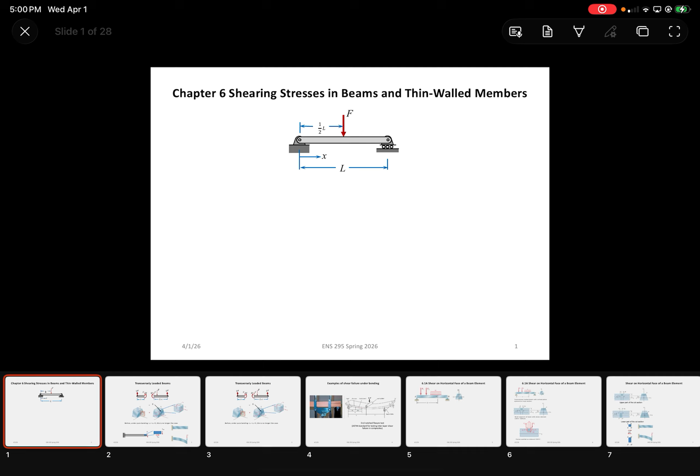That's two separate tires? Two separate tires, I think. He texted me and said, 'You're never going to believe this.' He sent me an email and said, 'You're not gonna believe this, but I got another flat.' I was just flabbergasted, I couldn't believe it.

Is it just the tires that he messed up? I don't really know, he just sent me 'you're never gonna believe this.' Hopefully it's just the tires, because when I got my flat earlier this semester, the rim got all messed up. I had to take it to a place because when I went to the Kia dealer, they quoted me like $1,000 just for the rim and tire. I was like, I'm not paying that, no.

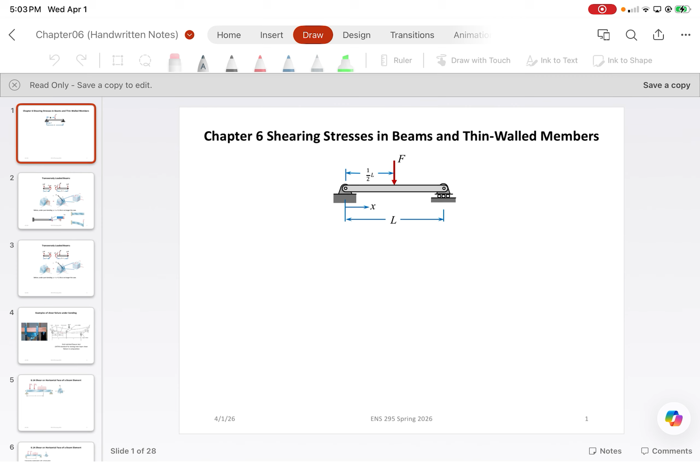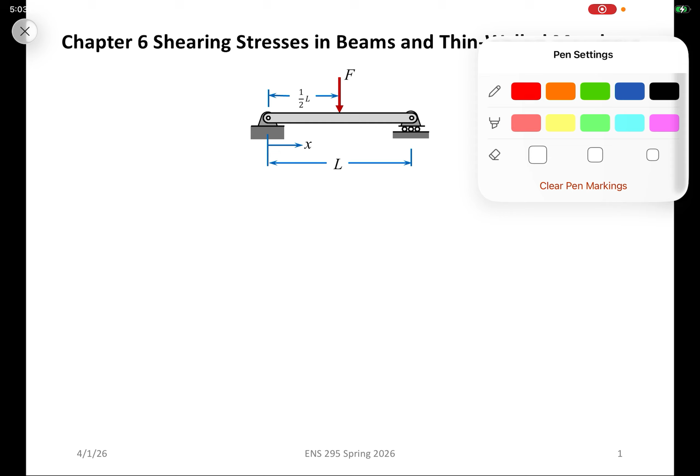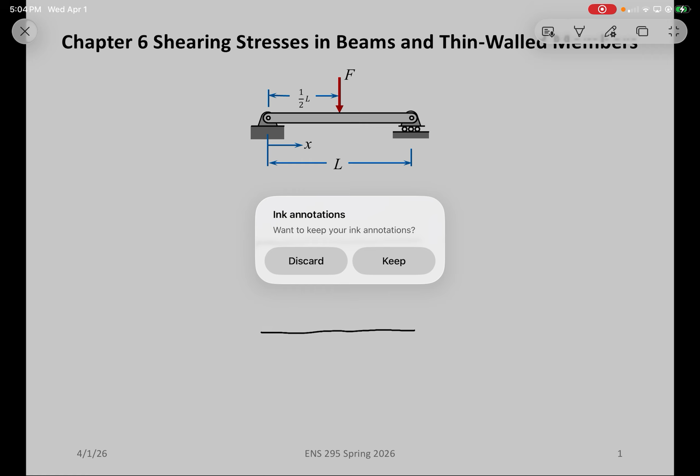So if you guys recall, we learned last class and the last few classes how to draw the shear force and bending moment diagrams from this loading shown here, where the load is directly at the center. What we should end up with is basically a shear force diagram that looks exactly like this: the shear force is going to be equal to F divided by 2, and then negative F divided by 2. Then from there, we learned that you can draw the bending moment diagram using the geometry of the shear force diagram, and that bending moment diagram is just going to equal FL divided by 4.

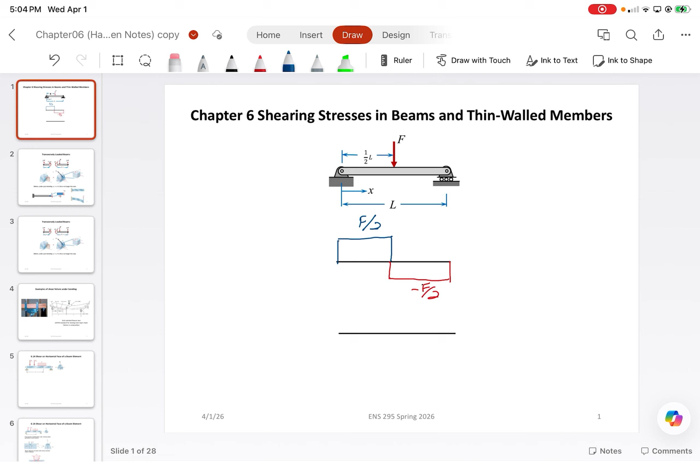You can do all of the cutting sections to derive the equations for each of the curves, but once you get familiar with a lot of these diagrams and the standard conditions, you actually just start memorizing a lot of the equations. I memorized this one and probably 50 other ones—you just get very comfortable with it. So we learned that from the bending moment diagrams, we would use the My over I equation, or the M over S equation, to analyze the beam in bending. But for shear, we still don't know how to exactly design this beam.

From the beginning of the semester, we have our average shear stress equation, which is V over A. We could potentially use V over A, but the shear stresses are actually going to be a little bit more complicated than this, especially in flexural members, which is what we'll get into.

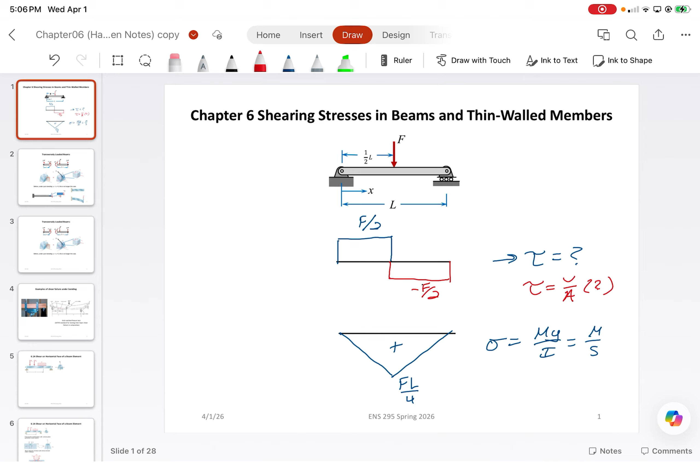For transversely loaded beams, what we have are shear force and bending moment diagrams. If we analyze a small cube at any particular extreme location, what we end up with is that stress block, which is something related to the Mohr circle. So we could actually draw Mohr circles for beams subjected to shear and bending.

In some instances, towards the extreme top and bottom fibers of the beams, which is the maximum location where bending stresses occur, you'll actually find that the shearing stresses on those edges are actually 0. We'll get into a little bit about why it's 0 and the mathematics behind it.

Ultimately, we can basically determine that under pure bending, the shear force is basically 0, because when a member is subjected to pure bending, the bending moment diagram you would see would actually be a constant value.

A good example of this would be if we have a beam with a cantilever support, and then just a direct moment is applied. In this case, you would actually find that your reaction force is 0, and hence you would just have a negative moment directly here.

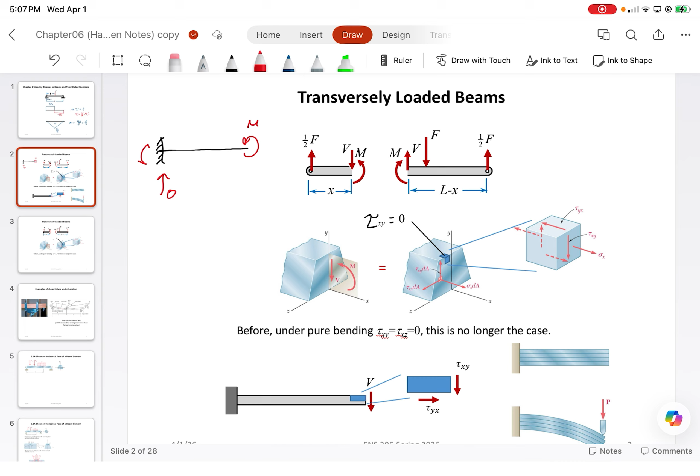Now if you were to draw the shear diagrams, you would find the shear force diagram is just 0. There's no vertical forces contributing to shear, but our bending moment diagram would just be a constant block like that. We call this pure bending, which is what we discussed in chapter 4. You just never really saw it from a chapter 5 perspective.

So that's why we have basically no shear force whenever we're subjecting a beam to pure bending, because there's no shear forces to contribute to shear stress.

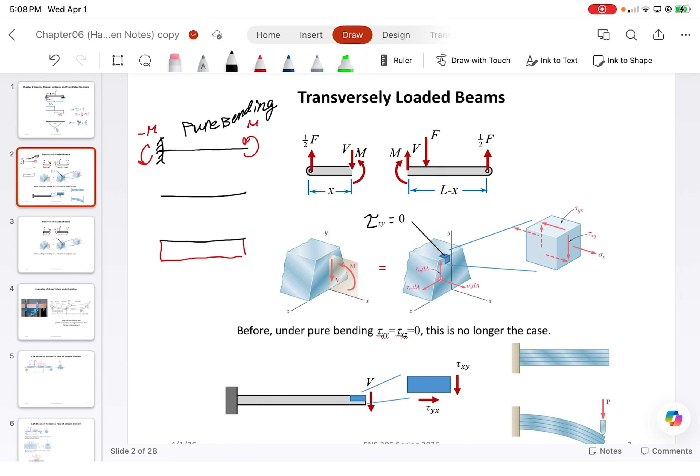So we move on a little bit, and ultimately what we would find by analyzing the equilibrium of these little nodes, you would find from sum of the forces in the x direction, we know that has to equal 0 for equilibrium. You would find that the integral of tau xz, that's this shear force located right here, coming out of the plane, times dA, that has to equal 0.

But if we do sum of the forces in the y direction— oh wait, no, that's sum of the forces in z. Yeah, because technically sum of the forces in x would give you the normal stress.

My bad. So from sum of the forces in the y direction, you take an integral of tau xy dA, and that integral should technically equal negative V. So the shear force is just equal to the negative integral of tau xy dA over the area.

Does that make sense so far? If you think about it, the cross-sectional shear force is just going to be acting downwards, V. The shear stress located here is tau xy dA. So when you do sum of the forces in y, you get that the shear force should just equal the integration of the shear stresses within the cross-section.

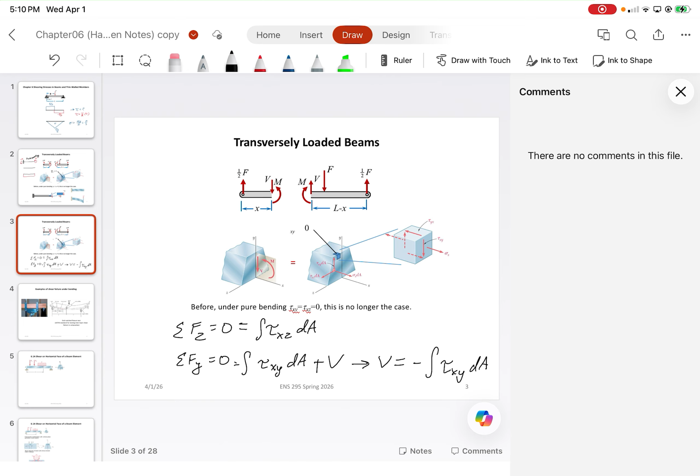Now, we learned previously how some beams may ultimately fail in bending. One of my favorite examples that I like to personally sketch out is generally with concrete beams. So let's say we had a concrete beam right here.

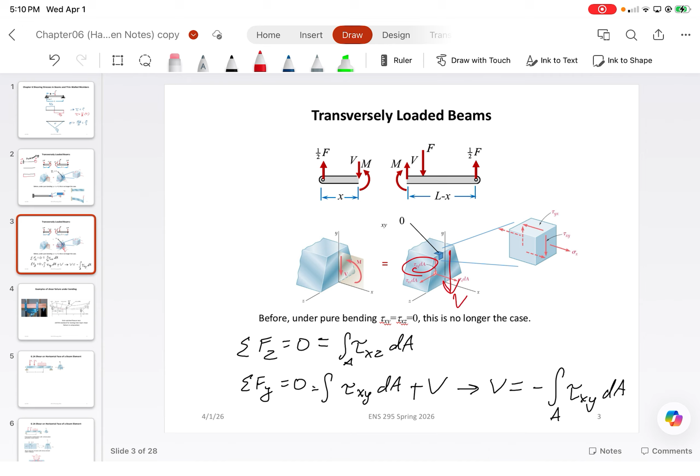In many cases, if you were subjecting a load directly downwards, you would actually find that the cracking is heavily dependent on the type of failure. So for bending cracks, where do you think they might most likely occur? At the bottom, along the midsection—exactly, because that's where the maximum bending stresses occur, resulting in maximum tension within that concrete beam. So you would actually see cracks start to develop.

Now when it comes to shear forces, however, concrete's a little unique, so the shear plane is going to be a little bit weird looking, but for steel and other metallic structures that behave more linear elastically, the shear planes would actually just be cracks that are propagating like that. For concrete, it tends to move on a 45-degree angle, but for shear cracks, you would actually see that the cracking is occurring more towards the end sections more than anything else.

Does that make sense?

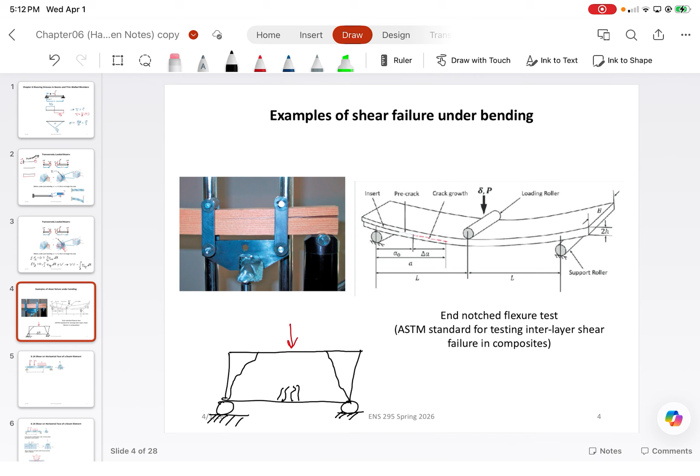All right. So now just going into a little bit of the math, shear on a horizontal face of a beam element. This is basically just looking at the shear forces that are directly vertical on that face, which is going to be the YZ face. This is assuming the X is along the length of the beam. We consider it as a prismatic beam. So you consider AB as a prismatic beam, which means it's just a relatively simple shape and it's uniform in terms of the material properties.

When you analyze the internal forces at a particular point, in this case, that point is going to be defined by our little stress block, Mohr's circle again, C, D, C prime, and D prime. You determine that you have both normal stresses, which are the sigma C and sigma D times dA due to the bending stresses, along with shear forces that are ultimately going to be present along the sides of that block. So when we do sum of the forces in the x direction equals 0, that delta H is going to be a term which we call shear flow later on. Basically, that delta H term is then added to the area underneath that axial stresses, which that total force is going to equal the integral of the sigma C minus sigma D times dA. So that's the summation of the two stresses times their associated areas, which the areas should match.

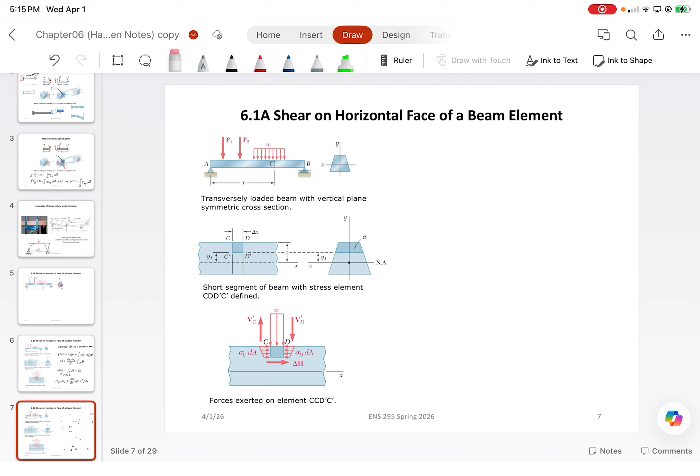Let me just paste this and erase all of this now. All right. And so performing that substitution with knowing this term here into that delta H equation back up here, we would actually find that delta H is just equal to VQ over I times delta X, which is the horizontal shear force that's felt by the beam. This is ultimately how the shear forces get transferred directly to the reactions. They have to be carried some way into the beam. So that's why when you draw out a lot of these diagrams, you kind of have positive and negative. It just indicates that the directions in which the shear is being carried is going different directions, if that makes sense.

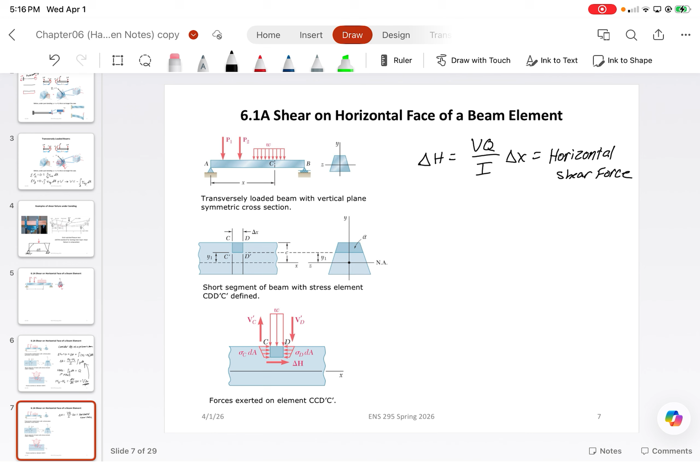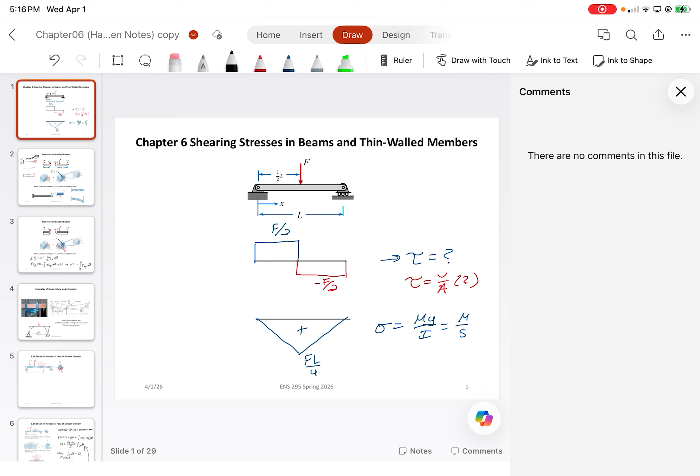All right. Now from here, we can actually break it down on a per unit length term. So what we end up with is this new term we call q, which is just equal to delta H over delta X, which simply breaks down back to VQ over I. And this we call shear flow, which is just the force per unit length. Any questions about this so far?

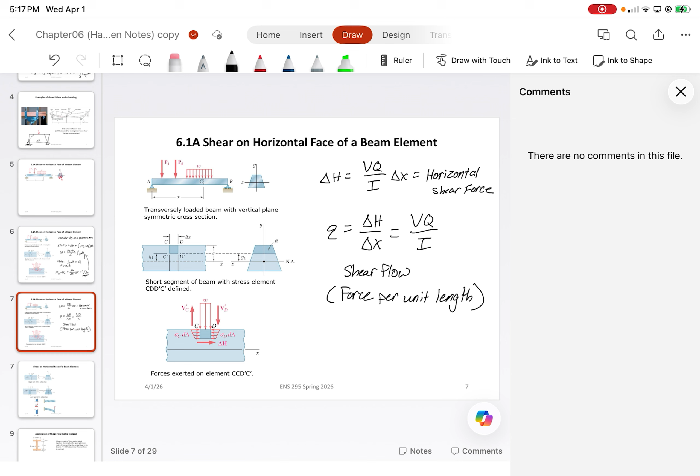All right. So with our shear flow ultimately determined, shear flow, which is equal to q equals VQ over I. You need to note that Q is just equal to the integral of y dA. Recall that the second moment area of inertia is equal to the integral of y squared dA. This is your statics.

And ultimately what you would find is even if we analyzed the forces all along the bottom, the equation will still hold true. So even if you considered C prime, D prime, C double prime, D double prime, you would still get that basically just q is just equal to negative q prime. So the shear flow would just be equal but opposite in sign. And then delta H is just equal to negative delta H prime, which those are just the shear forces basically felt by the bottom part. So they have to be equal and opposite to each other.

All right, now you might be wondering, in what way does shear flow ultimately come into play? We're designing for a shear force that's acting horizontally, but we still need to analyze the shear forces acting in a vertical cross-section. One such example that you would typically see shear flow is if you had built up members that had some type of nailing directly into the floor, into like a vertical element.

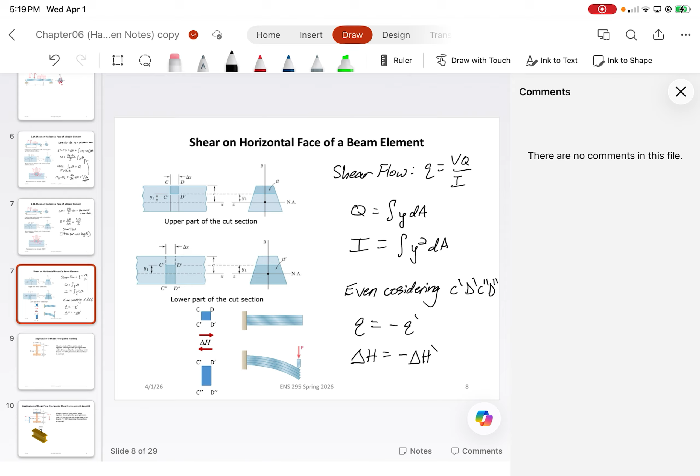A good example would be like wood beams. Maybe you have a floor deck that you're basically nailing directly into a beam, and you need to design for the shear forces within the nails transferring. Another good example might be those composite concrete and steel decks. A lot of times those steel decks actually have welded studs on top in order to provide bonding to the concrete, and there's shear flow that's actually within those studs that ultimately need to be designed for.

Analyzing this, we could determine what the shear force within each of the nails are using our principles of shear flow. So hopefully you guys should just be able to notice that this is a directly symmetric cross-section. So our Y bar is just basically going to equal 70 millimeters. 100 plus 20 plus 20 divided by 2 is 70, right?

Now, we also need a few other terms. We need to recall that shear flow q is equal to VQ over I. I is the second moment of area of inertia of the entire cross section. So what we need to do is compute I for the cross section.

This I, if you were to develop the tables, we could actually just do that. So component, A dy, A dy squared, and then Ix. We could have the top flange, the web, and then the bottom flange. The area of the top flange is going to be 200 millimeters squared. Same with the web, and same with the bottom flange. The location of the neutral axis of the top flange is going to be 50 plus 20 divided by 2, so that's 60. The web is at the neutral axis directly, and then the bottom flange is just negative 60.

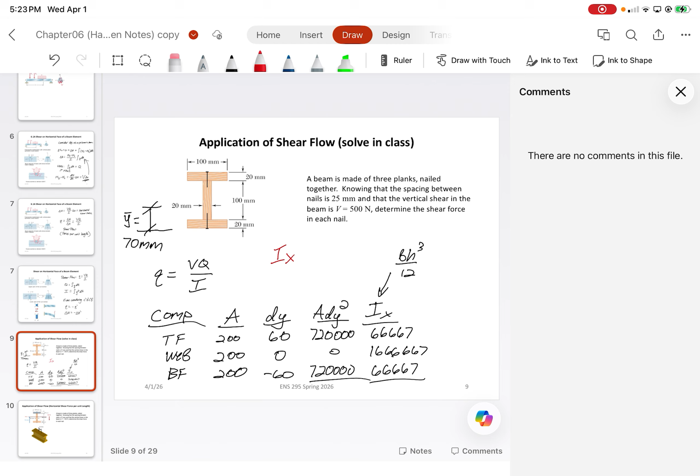All right, now that kind of begs the question, what is Q? Q is actually heavily dependent on the position in which our shear flow is ultimately occurring. In this case, the shear flow is actually occurring right at the interface of the top flange and the web. So our shear flow is occurring right here and right here. Fortunately, because it's symmetric, we only need to calculate the shear flow for one section. The way that we do that is we ultimately just take the area above the region that we're interested in.

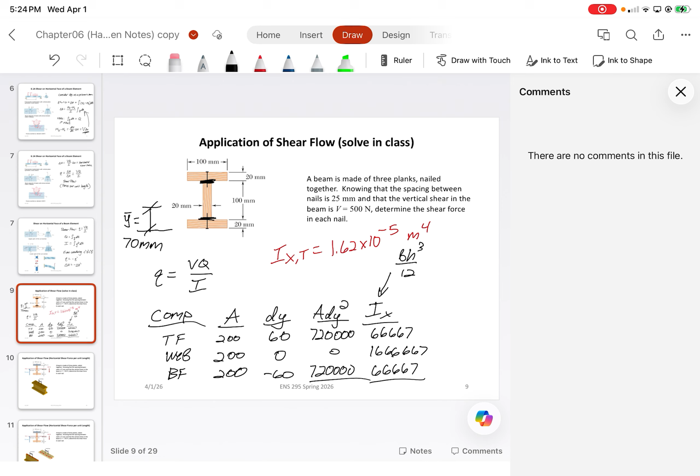And so that Q term, I generally like to define this as A tilde times Y tilde, where A tilde is basically the area above our point of interest. That's going to be that grayish shaded region here. And then Y tilde is basically the center of that block from the neutral axis.

So A tilde just equals 100 millimeters times 20, which is 2,000 millimeters squared, so 2 times 10 to the negative 3 meters squared. And then that Y tilde is just equal to 0.060 meters. Again, that's the 70 millimeters, and then you have to subtract half of the flange to give you 10. Doing this, you should get that your first moment of area at that region is 1.2 times 10 to the negative 4 meters cubed.

With that in mind, we can now actually calculate what the shear flow ultimately is. So, not V, lowercase q, shear flow, is equal to the shear force, which this problem tells us is 500 newtons. Q is 1.2 times 10 to the negative 4 meters cubed. And then I is the entire cross-section, so 1.62 times 10 to the negative 5 meters to the fourth. And what we end up with is a shear flow of 3,704 newtons per meter.

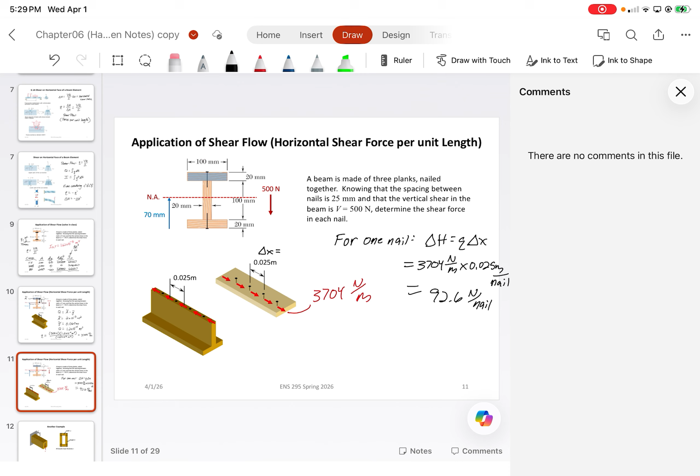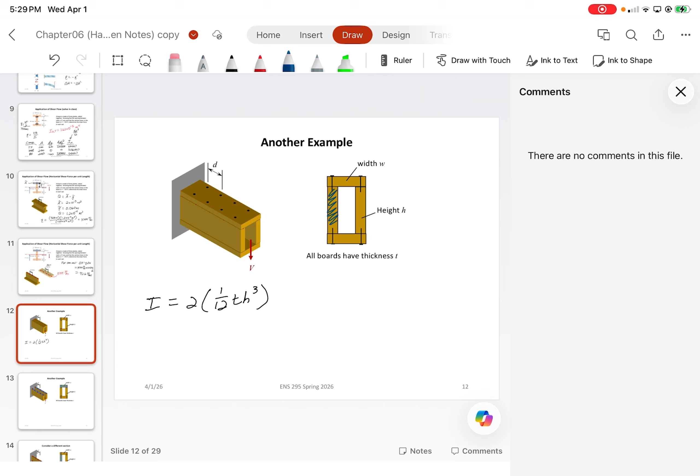The I for this built-up cross-section equals 2 times 1 over 12 times the thickness of each member times the height cubed. That is the term used for these values here, plus 2 times 1 over 12 WT cubed plus WT times 1 over 2H plus 1 over 2T squared. That is for these regions, the top and bottom flanges there. So that's blue, and this is red.

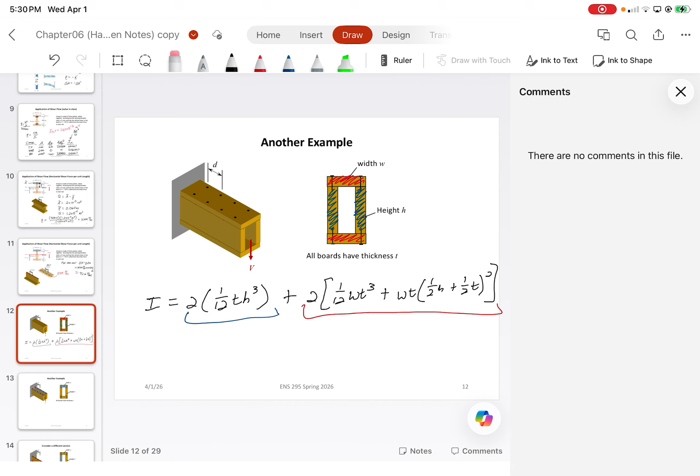Now, if we wanted to analyze the shear force per nail, there's a few ways we can do this. The first method is by taking the block at the interface above it and taking the areas with respect to that region. By doing this, we get that the shear force equals Q times, in this case, the delta X term is set equal to a nail spacing of D. So Q times D, which simplifies to VQD over I.

Now we need to keep in mind that in this case there's actually two nails within the cross section, so each nail is going to carry some shared portion of that load. So the force per nail equals delta H over 2 -- two nails at the interface -- which means our ultimate design force would be VQD over 2I. Does that make sense, why we're dividing it by 2? If you had 3 nails within the interface, you would just divide it by 3 and so on and so forth.

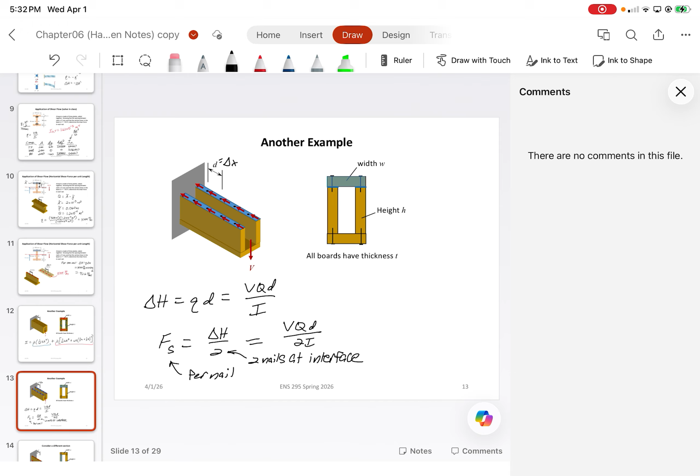Now, what about in the event that we take Q equal to this? How would we rationalize this? What do you guys think? What would Q be? What would the shear flow be in this case? Let me ask this first.

What would our first moment of area be for this section? I'll give you a hint: what's that y tilde term, the distance from the neutral axis, or the center of this shape, from the neutral axis? Zero. So what would Q have to be? Zero, exactly. So the first moment of area of that section would actually be 0.

What does this mean about our shear flow and the shear force per nail? Remember our equation, q equals VQ over I. What does this tell us about the shear flow? Exactly, so Q equals 0, lowercase q equals 0. I'll tell you why: when we analyze the neutral axis and draw the forces above and below it, the net areas' forces are equal and opposite to each other, so the net shear flow felt within that shape, both top and bottom, sums to 0.

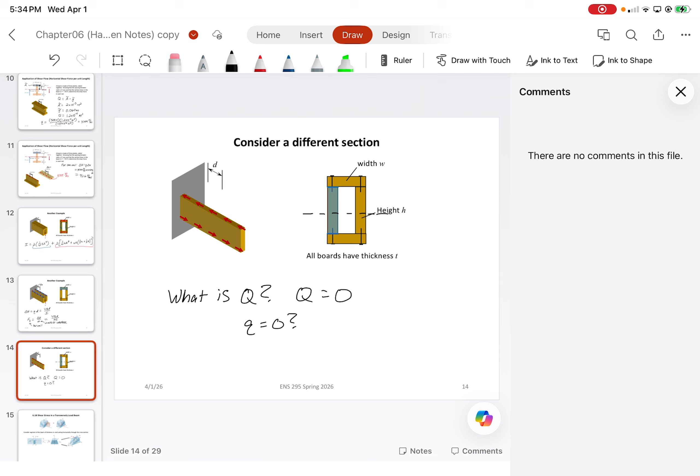Whereas previously, we had this top section here, which means our entire shear flow was all just acting in one direction, because the shear flow was, let's say, positive up here and negative down here. But we're not analyzing it on a symmetric level, if that makes sense. Instead, you're just analyzing it per unit length. Does that make sense? There's no area to take underneath the neutral axis because the area is limited to that top flange.

So that's a good note to add. It's because the result is the net total shear per unit length on the selected interface. And then basically the shear at the top is equal and opposite to the shear on the bottom.

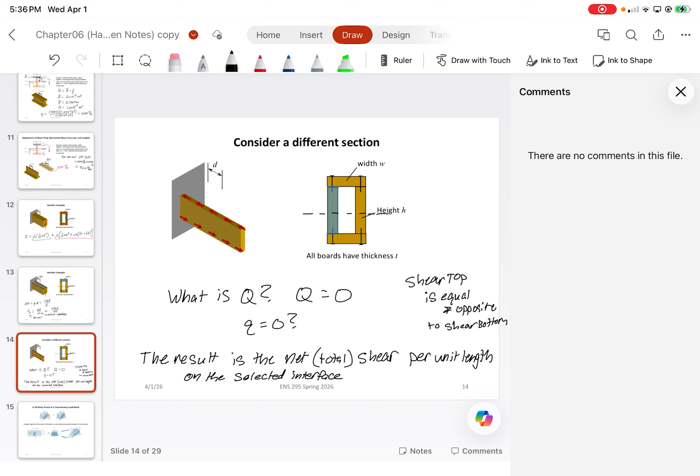Now, another interesting thing, not even really in the notes, but for this equation, the same area—if we wanted to analyze the shear flow along this plane another way, we could take this total area here. Because then the plane of interest, as long as we're not adding the top blue and the red, we should get exactly the same value. So really, the summation only cancels because our point of interest is technically being taken at zero, at the neutral axis. So you always want to make sure you're only selecting one side of the region.

Any questions about anything I've discussed so far? I know it can be a little bewildering. Don't worry, it gets worse.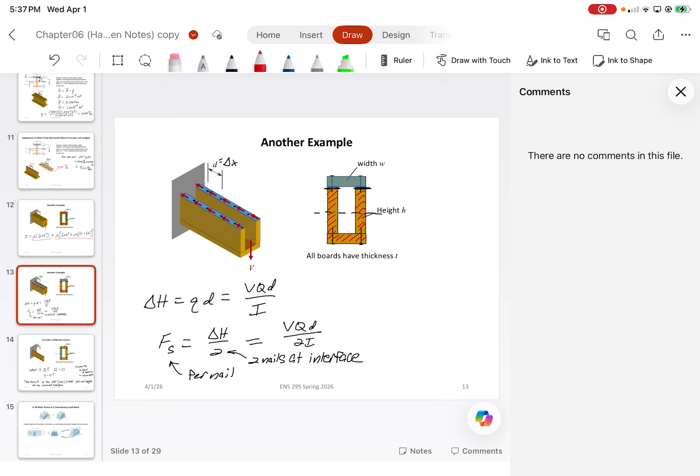All right, so that's basically how shear flow ultimately works. It's just the force gets carried horizontally along the length of the beam, and from there you can design welded stud anchors, or the nails in a floorboard system, and so on and so forth.

Let me just check to make sure I'm not rushing through this, because if not, I'll continue. Okay, so we could do up to 6.2 then. Awesome. That is what it just said, right? Up to 6.2. Yes. All right.

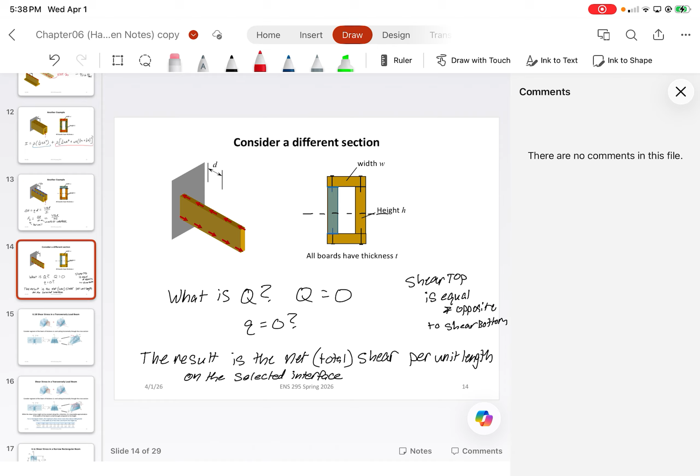Next section now is just talking about shear stress in a transversely loaded beam. So this is technically the shear stress in the actual cross section felt by the actual beam, not the shear flow, but the actual shear stress.

So we analyze the cross section, we look at the internal forces, and we ultimately cut a section. If you recall, that delta H term, which is the shear force, we set equal to VQ over I times delta X, where delta X is again the width of the region we're interested in, our tributary width for a nail or a bolt or whatever.

All right, so from here we compute the average shear stress on a horizontal cut face. We set this equal to the shear force, and then we divide it by its associated area, where delta A is just this small region here. Everyone should hopefully recall shear stress is equal to force divided by area, but we're doing it on such a small infinitesimal region that everything's going to approximate out to something more exact.

So we expand upon this. Delta H prime was VQ over I times delta X. So VQ over I times delta X divided by delta A.

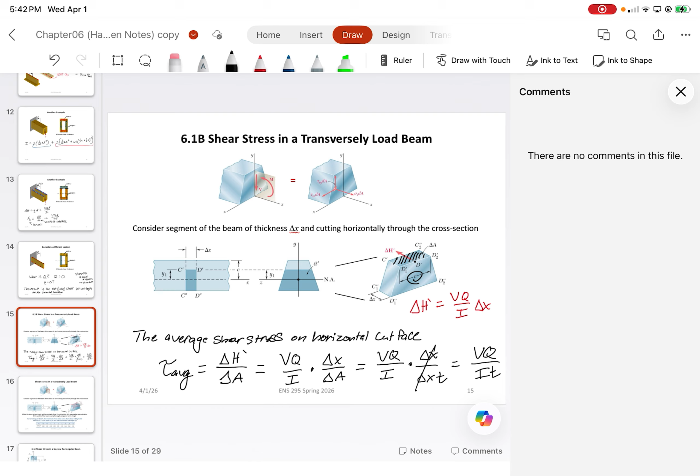There's no area there, right? It's just 0 because there's nothing for the shear force to carry. So because of that, Q ends up equal to 0, which is the reason why the average shear stress at the top and bottom of the beams is almost always going to be 0.

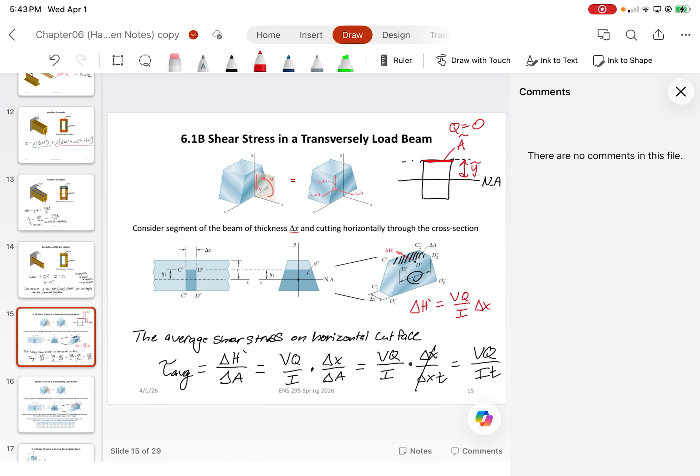While the shear stress might not be constant along the z direction, if we analyze those stresses, it doesn't necessarily mean that it's 0. But it is a reasonable approximation if the width of the beam is small enough compared to the height to assume that. So for a rectangular beam, the maximum shear stress is less than about 0.8% greater than the average. Because of that, you can generally make very good approximations, not to mention the horizontal shear stresses also just aren't a concern in general.

So those are the shear stresses felt in the z direction. Does that make sense? Yeah.

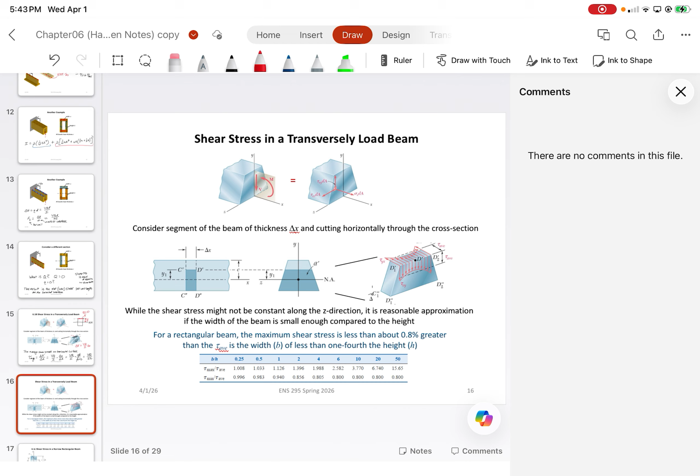I've got some examples here of how the shear stresses look. I even created an Excel spreadsheet to help you guys visualize the shear stresses along a cross-sectional axis of the beams. I'll probably provide you with those after class today. Otherwise, feel free to make some of your own if you want—I think it's fun to do.

Basically, shear stress in a narrow rectangular beam—this is just one example of how to calculate the general shear stress. We're going to see a comparison between what the general shear stress equation provides, the VQ over IT equation, versus the average shear stress equation, which is just a simple V over A. You guys will actually see how much of a big difference it is.

Hopefully we should recall that, so let's calculate the maximum shear stress. The maximum shear stress is always going to occur at the neutral axis. That's because this area is ultimately maximized. So tau max is at the neutral axis.

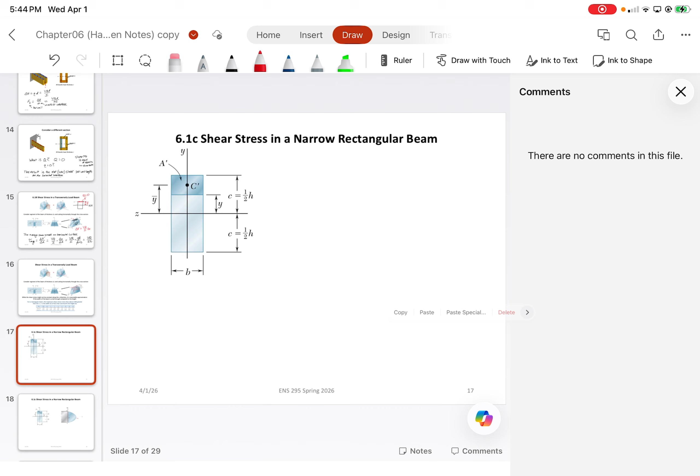Our Q term, which equals A tilde times Y tilde—this A tilde term, the shaded red area, is just going to equal B times 1 over 2 H. So it's equal to BH over 2.

Let me shift all of this down, because that's not technically Q—it's not moving. So A tilde was equal to BH over 2. And Y tilde is just equal to H over 4, because that Y tilde would be located directly here, which is just H over 2 divided by 2, which is H over 4. All right, so we plug all of this in, and what we end up with is BH squared divided by 8.

From here, we know that the second moment of area, the moment of inertia, is equal to BH cubed divided by 12. So when we compute tau max, it's equal to V times BH squared divided by 8, divided by BH cubed divided by 12. That's multiplied by the width at the point of interest, which, because the beam is uniformly the same width B, our point of interest is always going to be that width B.

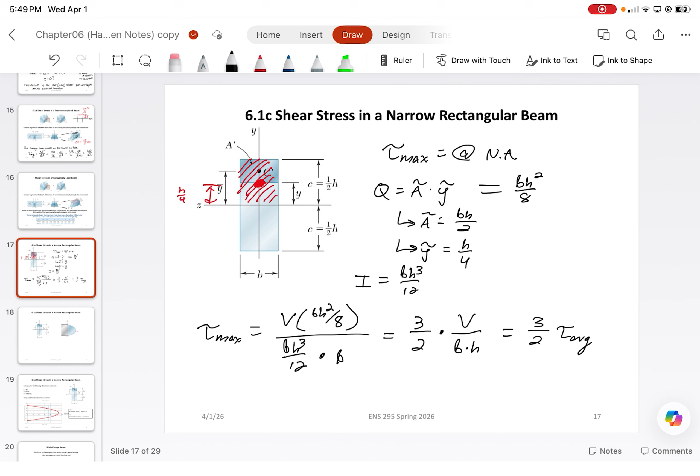3V over 2A—actually, I'll write it differently: 3 over 2 times tau average times 1 minus y squared divided by c squared. This would apply if instead of analyzing at just one particular point, you were analyzing at a variety of points, and then wanted to plot it in Excel to see how those shear stresses really vary.

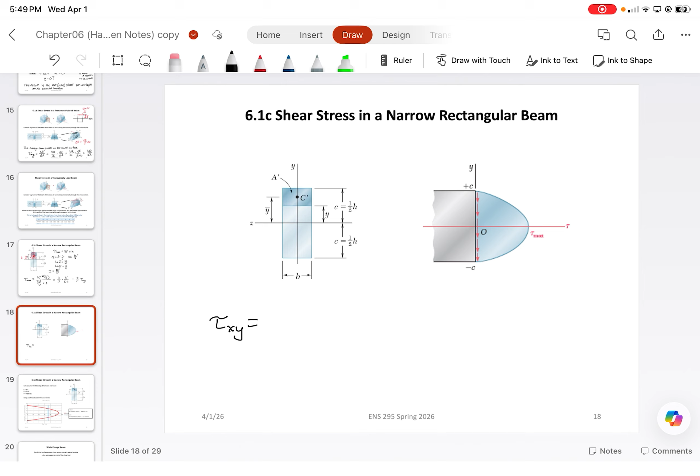What we would ultimately see is this quadratic distribution, which makes sense because our entire plot is heavily dependent on that y value. So the shear stress is ultimately dependent on the vertical coordinate from the neutral axis.

Using my spreadsheet, we can see numerical values for what this would be approximated to. If we assumed the width of the beam was 8 inches, the height was around 12 inches, and we had a shear force of 7,000 pounds, the maximum shear stress computed was around 109.375 psi, whereas the average shear stress was 72.917 psi. So it becomes a very significant difference, which is why you should always account for the maximum shear stress.

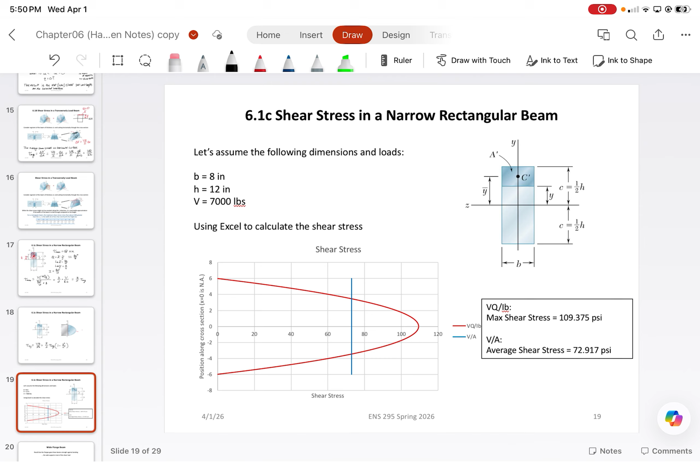Now, there are some exceptions, like in the case of wide flange beams. There's actually a reason why we use wide flange beams—their shape allows for a simplification of some design aspects. Not to mention the web itself doesn't really need to carry normal stresses. If you remember, the maximum normal stresses are always at the flanges, but the web forces are going to be small for normal stresses.

Now, knowing what we know, the normal stresses within the flanges might be great, but the shear stresses are actually going to be really small. This is because in our equation tau equals VQ over IT, for the tau in the flange, the T is actually much larger. So the tau in the flange is much smaller than tau for the web. That's because the value of T is the difference between something like 10 inches and half an inch, for example. I just spit out some numbers, but you can see how that significant difference can really impact the magnitude of the shear stresses.

That's why we ultimately have this giant jump here—do you see that? Because then your unit width isn't necessarily just one unit width, it's the width at the point of interest. So if you're in the flange, the width would be that giant value of T, the flange width. But if you're in the web, it's just whatever the thickness of the web is. That's why we have that immediate jump that occurs right there.

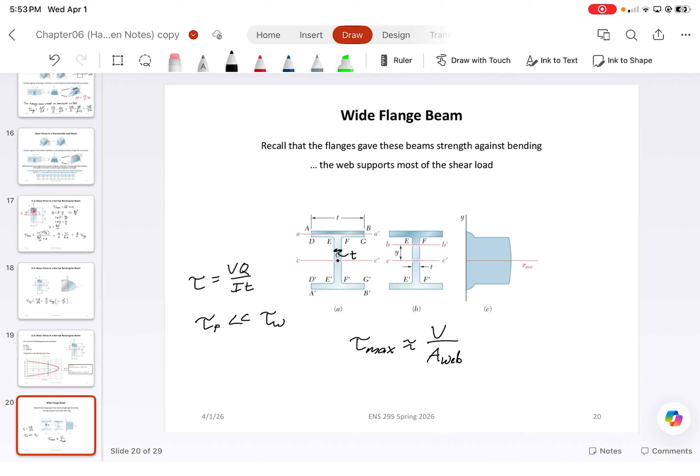In this case, the flange width was around 10 inches, and the beam depth was around 10 inches, so the web height was around 8 inches. Let me sketch this out: this was 10 by 1, then this shape here was around 2 by 8, and then this shape here was also 10 by 1.

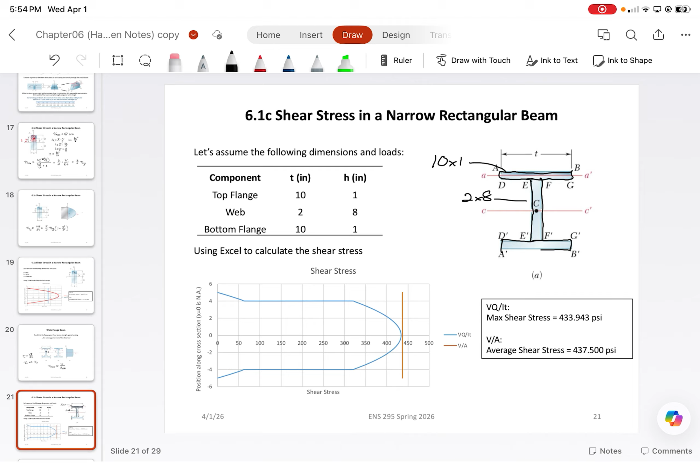Now, when you use VQ over IT, you can calculate this on an iterative basis—I calculated it on a shear stress per point basis. What you ultimately find from using VQ over IT is that the maximum shear stress is around 433 pounds per square inch. But if you just took the area of the web, which is 2 times 8 inches, you get an average shear stress around 437 psi. So it's a very small difference, which is why when you're generally dealing with W shapes, just take the area of the web, take the shear force divided by the area of the web, and you're done with the problem—nice and easy.

Make sense about that? Awesome.

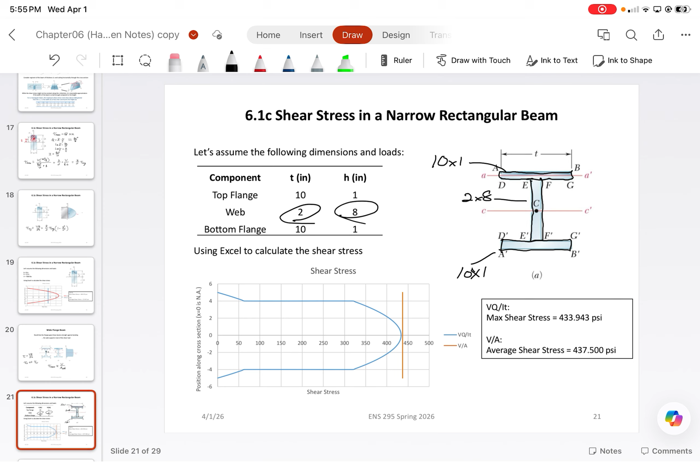Now, time for some practical examples. We've got a beam here that supports a load shown. We want to apply a factor of safety of 2, given that the allowable stress is 10 megapascals and the allowable shear stress is around 500 kilopascals. We ultimately want to conduct a full beam design. We're given that the width of the beam has to be 5 centimeters, so we just need to find the height. What we should be able to do by now is draw out the shear force and moment diagrams.

Let's do that really quickly. We know that because of the symmetric loading, each reaction force is going to be 1,000 newtons. We could follow our tip-to-tail method: 1,000 newtons closes out, negative 1,000 closes out, positive, negative, and each is 1,000 newtons. That's our shear force diagram.

Now for our bending moment diagram, we can take the area underneath each part of the shear force curve and draw out the bending moments. So we can calculate the bending moment at points 1, 2, and 3. M1 would just be equal to 1,000 newtons multiplied by 1 meter, which gives you 1,000 Newton meters. Because it's a rectangular shear force plot, it's going to be a linear bending moment plot.

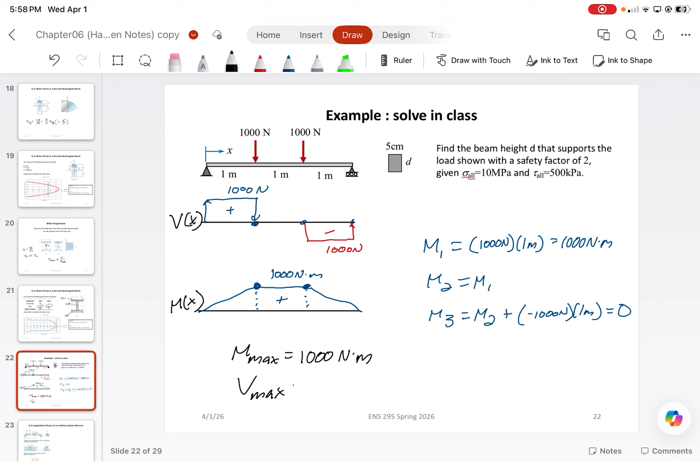With that in mind, we can calculate what the required height of the beam is. Let's check bending first, which is from chapter 4: sigma allow is equal to M y over I.

Now we want to apply a factor of safety as the problem said. So if we go back to our problem, our design forces are just going to be whatever forces are shown multiplied by the factor of safety. In this case, factor of safety of 2 gives 2,000 Newton meters and 2,000 newtons.

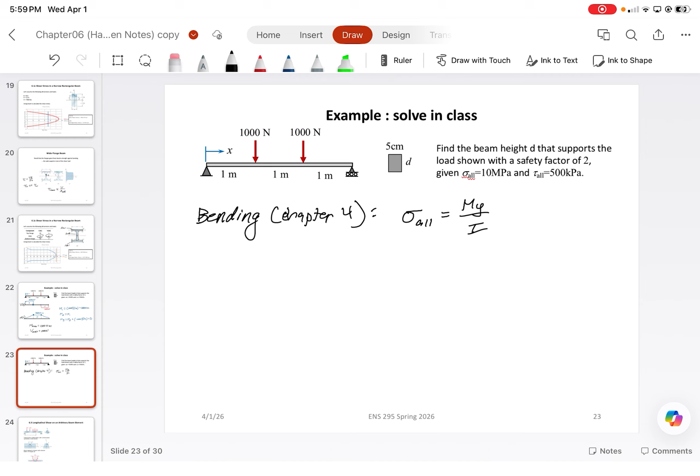Go back over to here now. We can rewrite this expression to say that the required y... actually, we know that the second moment of area, I, is going to equal 5 centimeters times d cubed divided by 12. I want to use basic units, so 5 centimeters divided by 100 is 0.05 meters, times d cubed divided by 12.

Where is the maximum normal stress going to occur with respect to the neutral axis? Remember where the maximum normal stress occurs, not shear stress, normal stress—at the top, right, because this is a rectangular cross-section, it's top and bottom, it's symmetric. So y in this case is just equal to d divided by 2. Let's throw all of this into our equation.

We have 10 megapascals... let's just use very basic units: 10 times 10 to the 6 newtons per meter squared is equal to the bending moment, 1,000 newton meters, times d over 2, divided by 0.05 times d cubed divided by 12, which gives d cubed over 240.

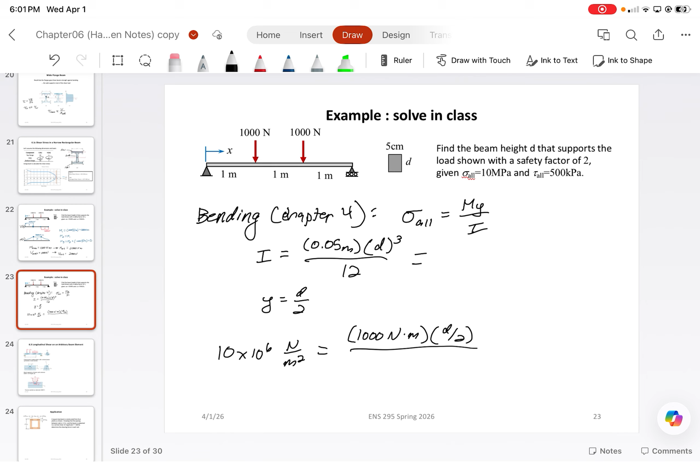Solving for D, let me throw it all into a calculator real quick. Put x over 10, x to the power 3, divided by 240. I'm going too fast. I get that the required depth of the beam when dealing with bending...

It's still taking a little bit of time to load, but it should end up being... that's not right, is it? Oh, that's why. Yes, good point. Yes, thank you. First mistake of the semester.

Now this calculator: 1,000 times 1 divided by 1. This should roughly be equal to 15.5 centimeters. Technically, if you use the official calculator, it would be 0.155 meters, which gives you the 15.5 centimeters. That's what I got on my calculator right here. Now, is that the end all be all? No, we still got to check shear.

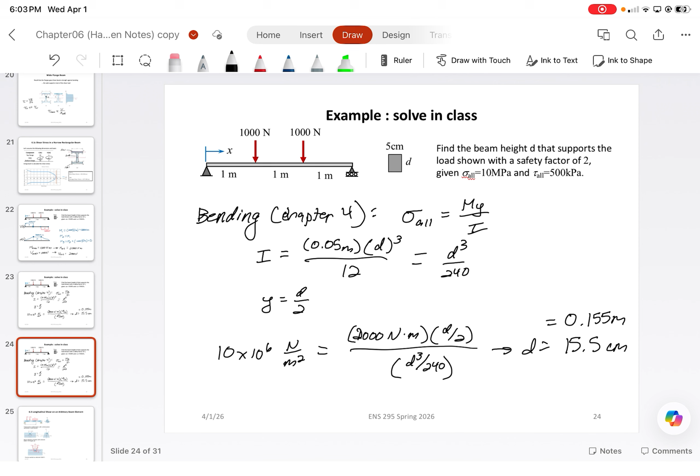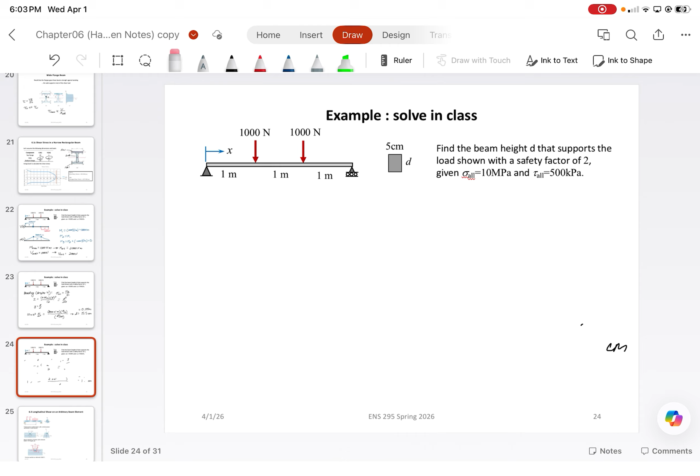All right, so now we check shear, which is part of this chapter. And we know that if we just used V over A, we would likely be under designing it, right? So we use tau equal to VQ over IB. And just for the sake of it, let's do a secondary check for what tau equal to V over A would look like.

So for tau equal to VQ over IB, we need to first know where the maximum shear stress is going to occur. Where does the maximum shear stress occur? I said it, I think, once. Where? Always at the neutral axis.

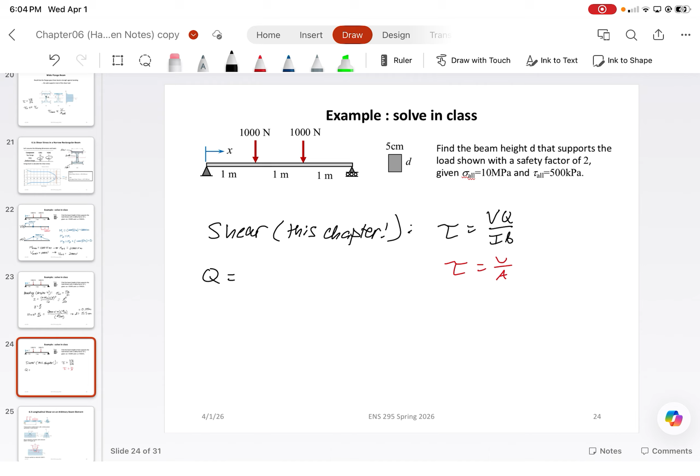So Q is going to equal A tilde times Y tilde, which if we zoom into this cross section here, our neutral axis is going to be D over 2 from the bottom, which means that our A tilde is equal to 5 centimeters times D over 2. And then our Y tilde is equal to D over 4, right? So what we end up with is 5 centimeters times d squared over 8, which, let's simplify this down to meters, so 0.05 meters times d squared over 8.

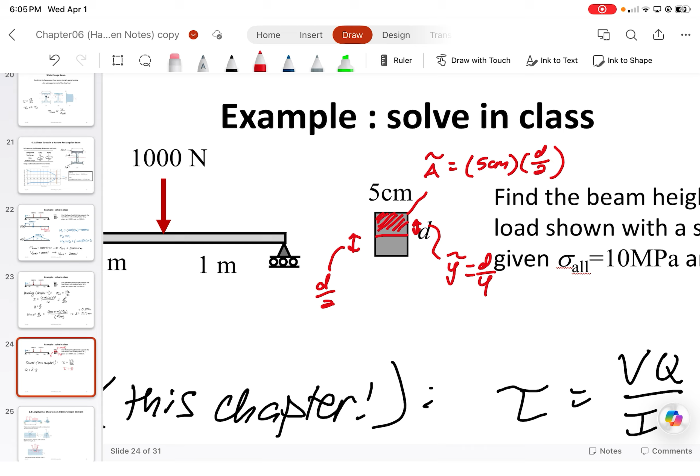So it's equal to d squared over 160. Our I is again just equal to d cubed over 240, which we computed for the normal stress. And then lastly, our width at the point of interest, which is going to be the point of the neutral axis, because it's a uniform width, just assume it's 5 centimeters, so 0.05 meters.

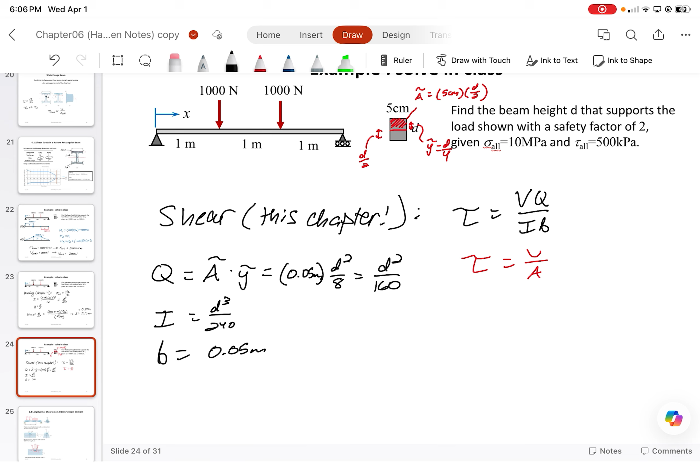So tau is equal to the shear force, which was 2,000 newtons for design, times d squared over 160 divided by d cubed over 240 times 0.05. And this all has to equal 500 times 10 to the 3 newtons per meter squared, because 500 kilopascals was the shear strength that was allowed.

Throw all this into a calculator: 2,000 times x squared over 160 divided by x cubed over 240 over 5. And then your value of d, you should get equaling 0.12 meters, which is equal to 12 centimeters, which is the required depth.

So which depth would we use? 15.5 or 12? Exactly. Go with the larger shape.

Now, just for the sake of it, let's check V over A. This would just be 500 times 10 to the 3 newtons per meter squared equal to the shear force of 2,000 newtons divided by 0.05 times D. What we should get using this approach is 2,000 divided by 500 times 10 to the 3 times 0.05, which gives 0.08 meters.

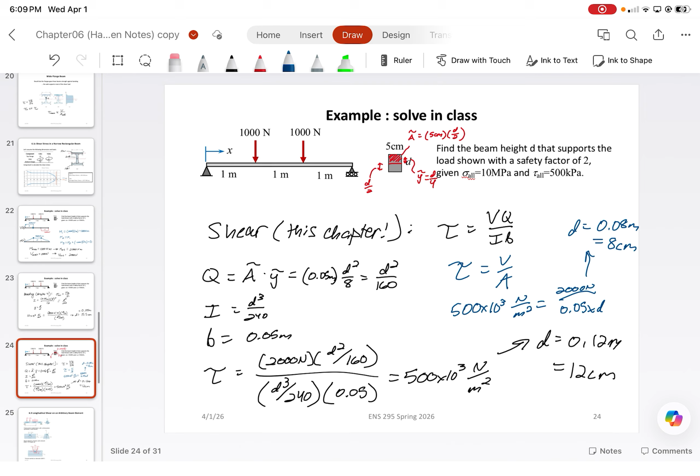So I guess we can kind of end it a little bit early. But yeah, hopefully you guys understand the premise that the shear force is just going to be dependent on the location at which you're analyzing it. For uniform cross sections, you can see that the maximum shear stress is heavily dependent on the geometry and will in most cases be higher than the average shear stress. And then obviously shear flow is something similar, but for horizontal shear that runs along the length of the beam, which you would use to design generally for nails, studs, or other connecting elements if you were using a built-up section.